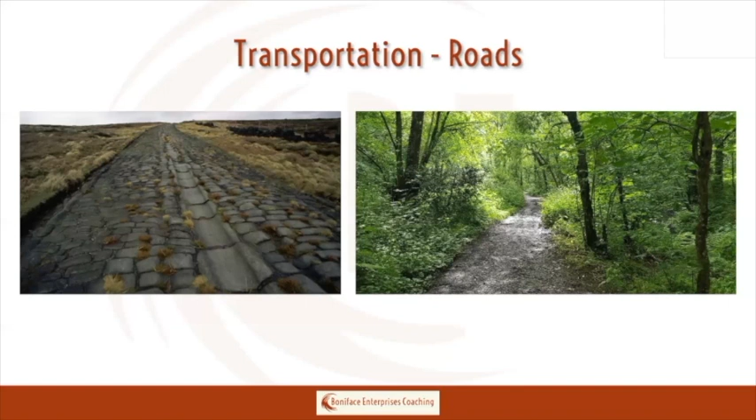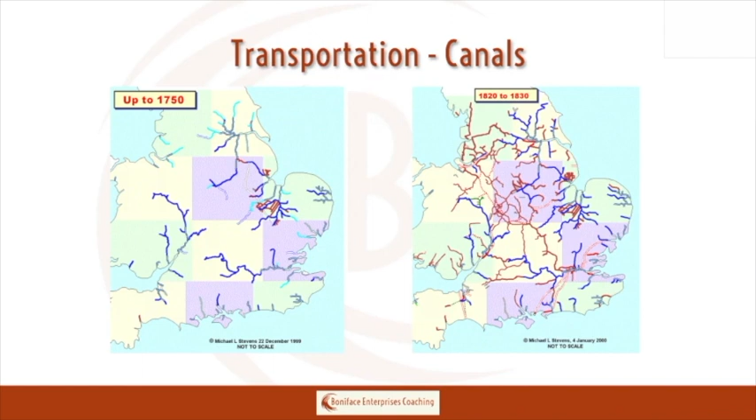And it helped that the materials can then be transported by canals and waterway. However, it was still the case that for the majority of house building, the cost was simply too much. And therefore, the main areas where we will see materials being transported, for example, slate from Wales into London or slate from the Lake District into London, would be by canal and by waterway into the main centres. And that's how, with Georgian buildings, we see many of them with slate roofs, because the material would have come by waterway and canal. However, for the majority of buildings, this was still too expensive.

So for example, I've been to places in Suffolk where there is no natural slate, and seen a Victorian building that had a slate roof, and from evidence it always had a slate roof, but that could have only got there because of the rail network.

So by seeing when the railway came through into that town gives us a clue as to when that building might have been constructed. And so looking at the rail network and understanding that can help with understanding the evolution of building and building materials in particular.

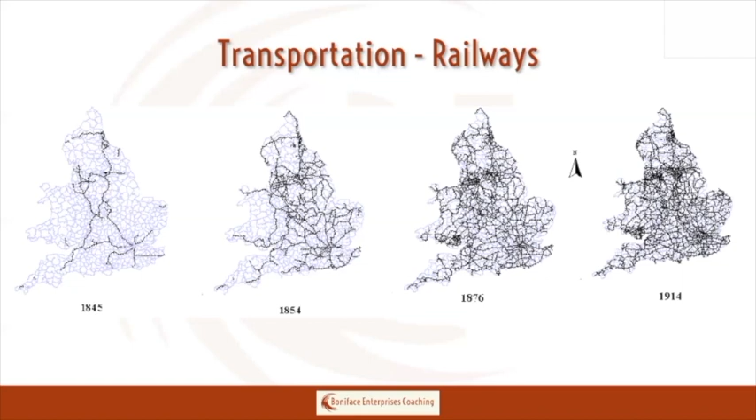But then in the 16th century, when there was a little bit more wealth about, they were able to put in a brick chimney. Now, it's not as if chimneys were a new invention by that time. After all, the Romans had chimneys serving their hypocausts, and many castles have chimneys. So the technology of chimneys was well known. It's just that most people couldn't afford them. But of course, by the 16th century, there was greater wealth generally in the country. And so chimneys started to be put in.

And then in the 17th century, we see that this building has had a change to one of the wings. Now, the question here is, does this wing incorporate the old wing, or does it replace it? And that's part of what we as surveyors or architects dealing with these buildings would need to establish and assess as we go through the history of it and looking at it. And then, of course, we get into the 18th century, when more wealth means that this house might have been a slightly grander building occupied by a larger family, and they needed more space, and so it was extended in the style at that time.

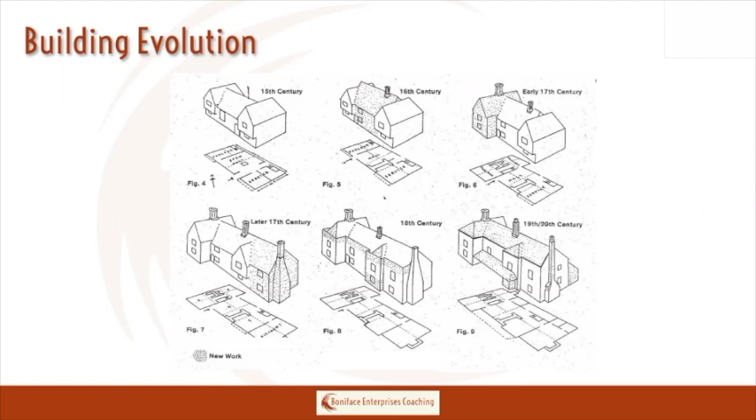Anyway, let's move on to our next of the P's, and that is the second P, the P of pathology. So here I want to think about the materials themselves, and I'm going to start by thinking about traditional versus modern materials. So traditional materials tend to be permeable, flexible, locally sourced, and they can be quite variable. And they tend to be crafted, in other words, handmade. And the build tended to be slower.

Whereas modern materials tend to be impermeable, inflexible or brittle, and they can be imported both from different parts of the country, as I've already discussed, but of course they could come from the other side of the world. They tend to be more constant because in the 20th century, we've had building standards and industrialization. That means we can produce fairly consistent materials, and they tend to be manufactured, some of them even being built in factories. And they can be rather fast builds as well.

So there are differences. Now, I'm not saying one is better than the other, but what we need to understand is that there is a fundamental difference. And when we're dealing with historic buildings, we need to understand those differences and assess, if modern materials have been imposed on a historic building, how that might have affected the performance of that building.

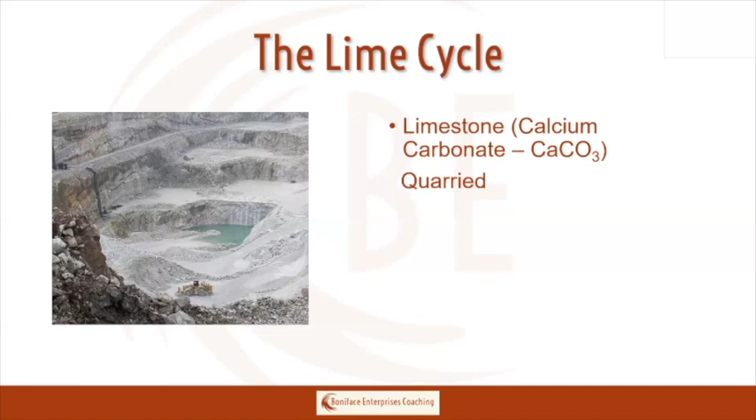Now, when we've got this material, we introduce water as quickly as possible and we combine it. This is called slaking. And it creates calcium hydroxide, which is in fact the slaked lime, plus heat. Now, there are three methods that we can use when dealing with this. One is to use an excess of water, and that creates a putty, and that's perhaps one of the more common methods in the past and certainly in recent years.

We can use a shortfall of water, and that creates a hydrated lime. But a method that has come about fairly recently and is rapidly becoming a very common method is to use damp sand, and that's called a hot mix. So those are the different methods by which we can combine the lime during the slaking process.

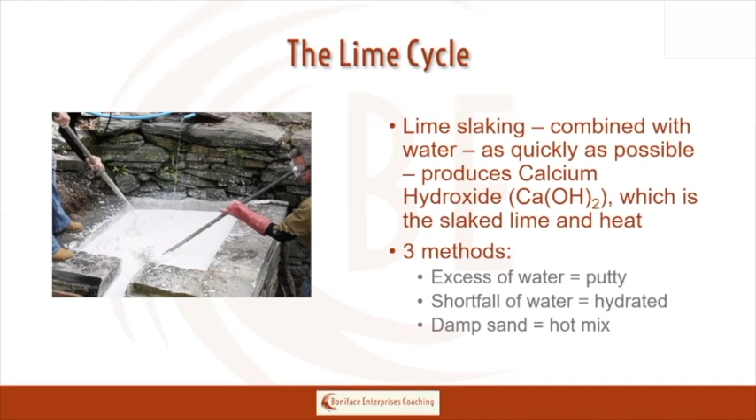What happens is lime carbonation. This is where the lime absorbs water-soluble carbon dioxide from the air. And at this point, it becomes calcium carbonate again, and hence the lime cycle. So we start with limestone and we effectively end with limestone. And that's the lime cycle. And it is important, if we're dealing with building conservation, to basically understand that and the process.

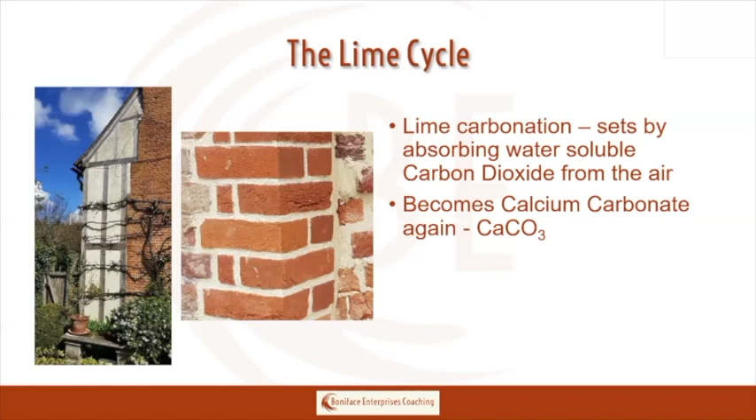But now let's look at some of the primary issues I've found affect buildings over the years and cause most concern for building owners. The first is, of course, structural movement. The second is moisture or damp. And the third is timber rot and infestation. Now, moisture and timber defects are closely related, so I'll deal with those a bit later on. But let's just firstly consider movement.

Now, there are various causes of movement, and of course, ground movement, whether it be because we're on a clay subsoil or landslip or even quarrying or mining underneath, can cause ground movement. And those are things we need to be aware of. It goes back to understanding the geology of the area we're dealing with.

But of course, we can have superstructure movement. Now, I mentioned earlier about buildings being altered. Now, sometimes those alterations lead to movement of the superstructure.

And it's important to understand what is going on with that building to assess whether the movement we see is indeed due to some sort of superstructure movement or movement between different materials. We can also get expansion and contraction of materials, and we get deterioration through rot, chemical attack, etc. There are many different causes of that. But we need to understand that movement is sometimes quite complex, and there are a number of causes that we need to think about when we see buildings that exhibit signs of movement.

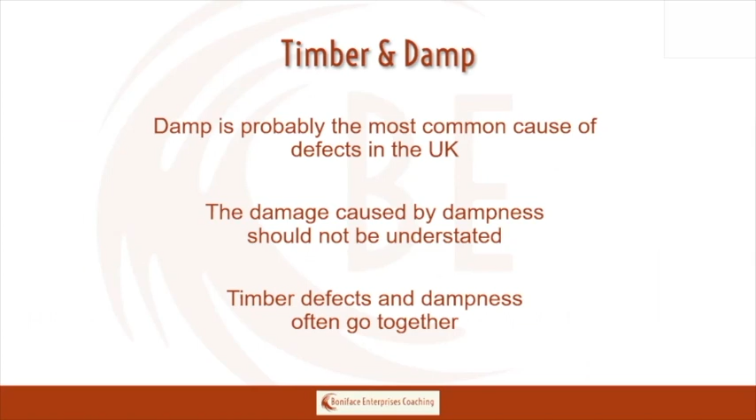So now let's think about timber and damp. Damp is, of course, the most common cause of defects in the UK, and we should never underestimate the damage that can be caused by dampness. And of course, timber defects and dampness usually go hand in hand. But firstly, I'm going to look at damp itself. So what are the causes and sources of damp?

Well, we do have our good old friend rising damp, and that we cannot ignore completely. But as I'm sure many of you have seen me quoted, it is said that I once said rising damp doesn't exist. That's not strictly true. I believe rising damp is in fact one of the rarest forms of dampness. And in fact, in my experience, it's the one that I'm least concerned about when I'm looking at buildings.

However, leaks, whether they be from a roof or from gutters or anything like that, penetrating damp, perhaps through neglect of joinery leading to gaps opening up, or perhaps pointing that has weathered and hasn't been looked after. And then, of course, we've got lateral water penetration. Perhaps we've got high ground levels and water's just simply penetrating laterally. And of course, we can have trapped moisture where modern materials have been used and have effectively trapped moisture within the construction. And of course, salts, hygroscopic salts in particular, can create a damp problem or the appearance of a damp problem. And I find that condensation is perhaps the most common cause of damp at the moment and for some years.

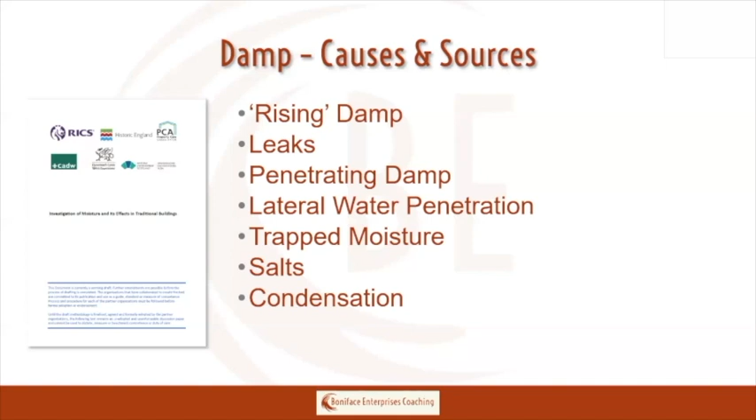The woollen overcoat will create a nice layer that keeps you warm. You go out into rainy weather and it will absorb that moisture and release it. If you are building up a sweat as you walk along, that moisture from your sweat will evaporate through the coat and you remain relatively dry or completely dry because the coat manages the moisture.

When it comes to a plastic Mac, it can be very effective in completely excluding moisture. That is until that little bit of rain gets in at the neck or down a seam somewhere, and it gets in and starts to annoy you because it can't get out again. Because once moisture's in, it can't get out.

And of course, if you're walking along building up a sweat, where's that sweat going to go? It's just going to stay within the envelope of that plastic Mac, and you just get wetter and wetter because the whole principle is to keep moisture out. What it can't cope with is moisture once it gets beyond that barrier. And that's often the problem we find when we look at traditional buildings and modern buildings, and the differences where traditional buildings have had a modern approach applied to them.

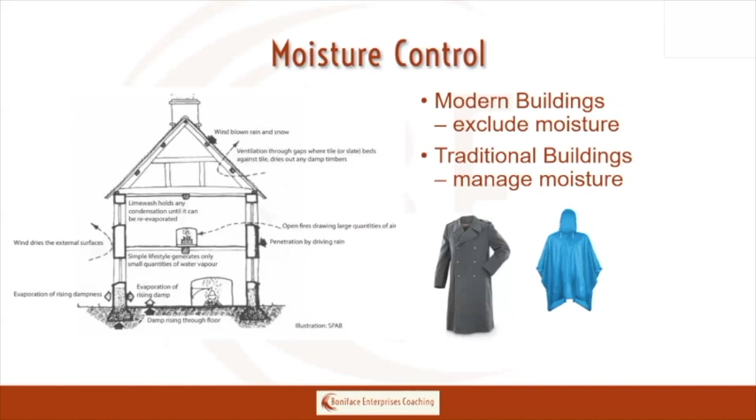But the important thing is to remember that all forms of rot start with a damp problem. And unless you resolve the damp problem, you are not going to deal with the rot. You can throw as much chemical as you like at the problem, but it won't solve it. You've fundamentally got to deal with the damp and the source and the cause of the damp first. Without that, you won't solve the rot problem.

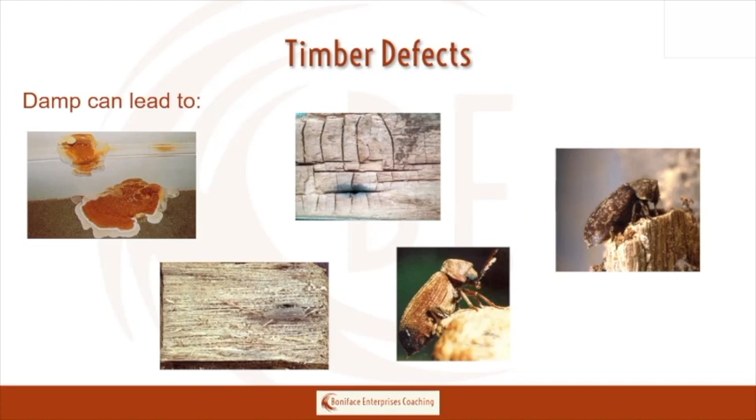So what are the remedial works that we can carry out? Well, the first thing is to identify the cause or the causes of the dampness, and therefore the rot or the infestation. And we then have to think about repairing or removing the causes. That might involve ventilating voids, rooms, lowering ground levels, repairing leaks, maintenance, etc.

Now, the use of chemical treatment, such as retrospective injection of damp-proof courses, is, in my view, rarely effective, rarely necessary, and is certainly a last resort, partly because it's irreversible. So I would say that we need to look at the building holistically and think about what is really happening to that building and not rely on chemicals to solve the problem. We need to ensure there's a suitable maintenance regime to avoid future problems.

And sometimes that means adjusting lifestyle, because some people simply don't know how to open windows and air a building. And that sometimes is all that's necessary. But there are times when we might need to amend the detailing.

I remember hearing of the Brighton Pavilion many years ago that suffered a major rot problem because the rainwater disposal meant that water was going into the building. And as part of the process of dealing with the rot, they had to actually amend the rainwater disposal system. So sometimes when we look at these buildings, we have to think about that.

If you think back to the evolution of building that I spoke about earlier, and the creation of a parapet where a parapet didn't previously exist, that in itself can be problematic. And sometimes we need to think about how we deal with these issues and amend detailing if necessary to ensure that the building doesn't suffer unduly in future.

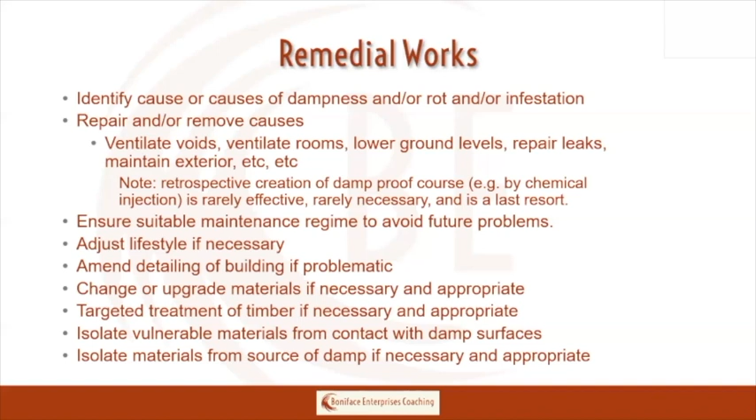So some of these remedial works, they're listed there. Targeted treatment might be appropriate in some instances. Isolate vulnerable materials from dampness, etc. These are all options that we need to think about with remedial works. But of course, what are some of the typical problems we come across when we look at repairs to buildings? And this isn't only timber and damp, but generally.

Well, I find that one of the biggest problems is simply ignorance. The fact that the builders, the professionals, the owners simply do not understand what they're dealing with. And so ignorance is something we have to deal with. And sometimes it is a matter of educating the clients, the builders, and so on and so forth.

The other problem is a desire for quick fix solutions. Quite often people want a quick solution to their problem. They don't want to wait. And damp problems in particular can take a while to sort out if we're going to deal with it properly. But people tend to not want to wait for the works to come into effect and for the problem to be resolved over time. And there is an over-reliance on chemical solutions and using modern materials and modern approaches inappropriately.

There's a lack of adequate defect analysis. People don't understand the buildings as I've gone through today. We need to understand what we're dealing with. And this can lead to a poor identification of problems, a lack of detailed schedule of works, and sometimes leaving the builder to get on with resolving the problem. And then when work is undertaken, not checking it to make sure it's been dealt with properly. And then again, no maintenance regime thereafter.

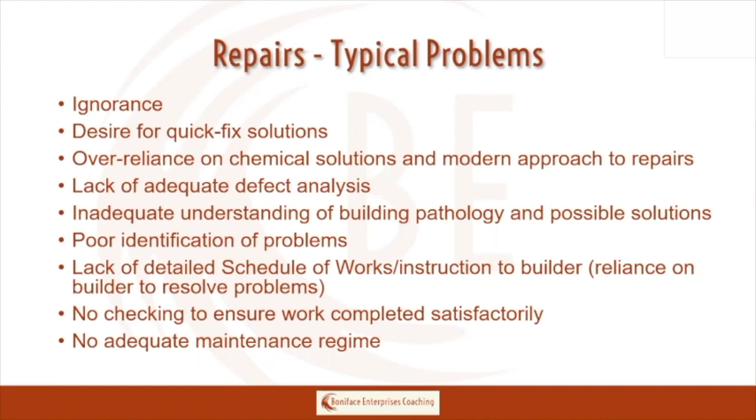And some years ago, some research was undertaken that indicates that about 1 in 5 of the residential building stock in this country dates from prior to about 1920. So it is a significant number of buildings that we're talking about. And these principles and some of the things I've been talking about are not only applicable to listed buildings, but any traditional building. But now let's move on to our third and final P, that of planning.

I want to deal firstly with some of the common myths. I come across these quite regularly, and I'm sure you do as well. Only the exterior is listed. Only what's mentioned in the list description is listed, and often that is only the exterior. Or only the features mentioned in the description are listed. Or the modern extension isn't part of the listed building, is it?

Or the final one I come across quite regularly is, well, it's only grade 2. It hasn't got the same level of protection as grade 1 and 2 star buildings. These are all myths that we need to deal with and knock on the head fairly quickly. So what is the reality? Well, the reality is that the legislation does not mention list descriptions. A list description has no legal bearing apart from the address itself.

The list descriptions that we see nowadays are more helpful than they were in the past, and I'll come on to that in a minute. But it is important that the list description, no matter how detailed or not, has no legal bearing. The legislation is not limited to exteriors, interiors, facades, or anything. It simply says the listed building is protected by the legislation.

That, of course, does lead to discussions about what is the listed building, what is curtilage, etc. Again, a talk for another day. The legislation does not mention grades. The grade is irrelevant in terms of the legislation. So all of those myths we can quickly knock on the head.

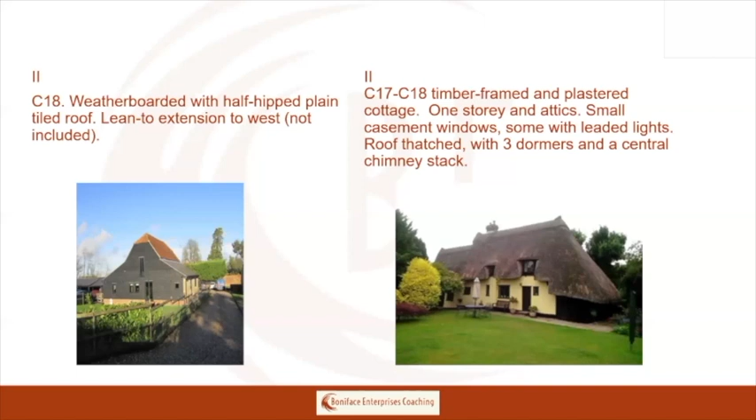Now, in terms of what we deal with nowadays, what we need to understand, because the list description is often unhelpful, is that we need to make our own assessment of the building. We need to make an assessment of the significance of the building and how important it is, and sometimes even how accurate that list description might be.

But let's just look at the legislation itself. The purpose of the legislation is to identify and record what it is that's being conserved. It also provides for the relevant authorities to be alerted when a threat arises, but it also allows for a method by which harmless or desirable works are permitted. But it can also provide sanctions when there are offences committed.

So let's look at the sanctions. Well, the first one is criminal prosecution. Now, criminal prosecution can be taken against those who cause the work to be undertaken. Now, what does that actually mean? Well, it means the building owner, of course, and the builder, but it can also mean the professionals involved. And we need to understand that. It's no small thing to face a criminal prosecution.

So what does that entail? Well, in the extreme, people could be sent to jail. That's very rare. It does happen, and it has happened, but it is very rare. Most of the time, it means a hefty fine, but it does mean that you've got a criminal record. And I'm sure that most of us wouldn't want that against us.

So that is important. But when we're advising purchasers of a listed building, we need to bear in mind that as they didn't undertake the work or cause it to be undertaken, they are not going to face criminal prosecution. So we shouldn't worry purchasers of a building unduly with regard to criminal prosecution. However, enforcement applies to anyone who presently owns the building. So if someone is purchasing a building, they need to be aware that there could be enforcement proceedings if those enforcement proceedings are thought to be appropriate.

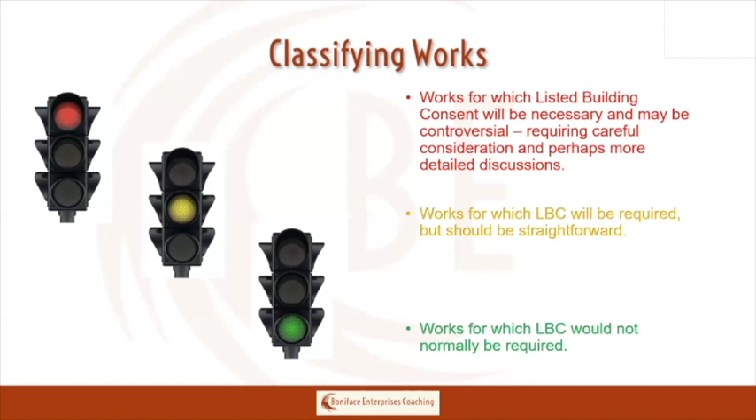So to summarize and to finish with, I just want to look at a general summary of conservation principles. Now, I've started with understanding the building, and of course, I've gone through that and why that's important. Minimum intervention. This goes back to do as much as necessary, but as little as possible.

Respect for past works. There may be things done to that building in the past that we might regard as a bit Heath Robinson. We may question the adequacy of that work, but if it isn't causing a problem, if there's no active issue there, I would say respect that and leave it in place. Don't just blunder into making a repair simply because it's an old repair and it's not how we deal with it today.

And then the next thing is be honest in your repair. If you're putting in a new piece of timber, don't try and distress it to make it look old. Make it honest. This is a modern repair. These buildings have gone through many repairs over their life, and this is just another repair as part of the process.

Sometimes we need to think about reversibility. If we're putting a partition into a building, we might want to think about scribing around cornices and skirtings and other details so that in future, if that partition is to be removed, its impact on that building is minimized or could hardly be seen at all.

And of course, we should abstain from speculation. Was there an oriel bay in that window at one point? Well, maybe there was, maybe there wasn't. We don't know. Don't speculate about it. If you've got hard evidence in terms of photographs or past evidence that you can turn to, that's fair enough, but don't speculate about what might have been otherwise.